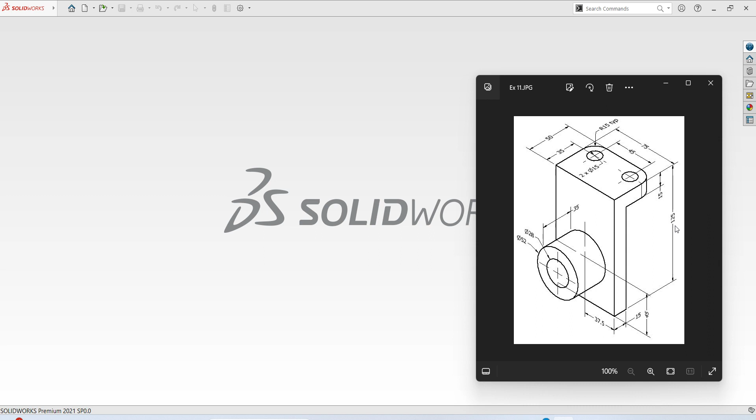You can see all the dimensions are mentioned. First I will create a base, then I will create a flange. You can see the base dimension is 125, 75, and 15 mm thickness.

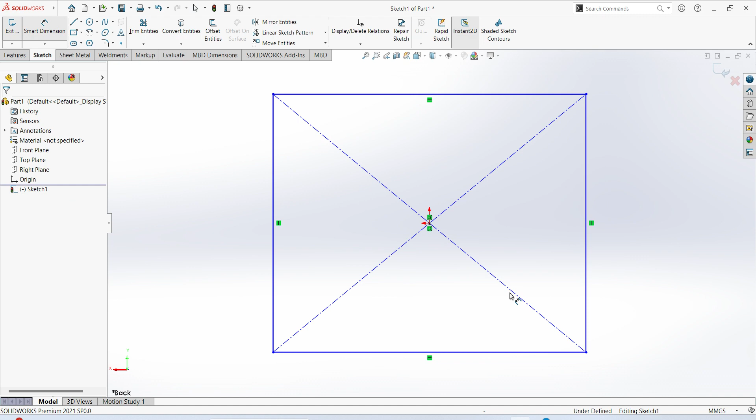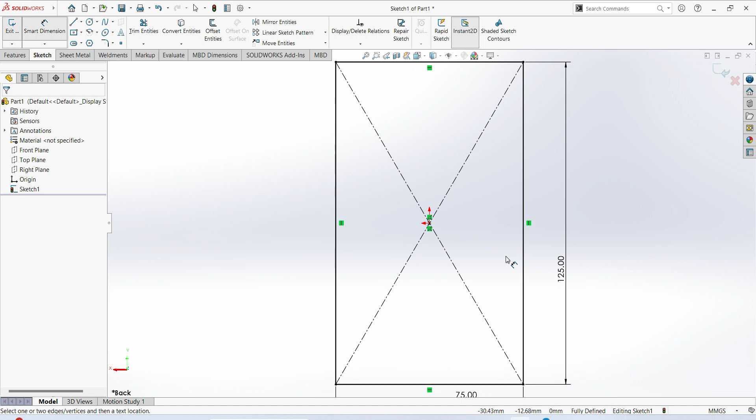Select extruded boss, front plane, normal, select center rectangle, give the dimension 75, sorry, 125. Finish sketch. Extrude up to 15 mm.

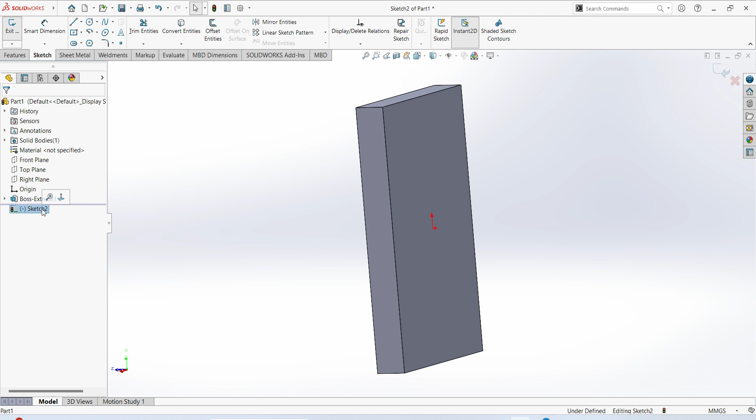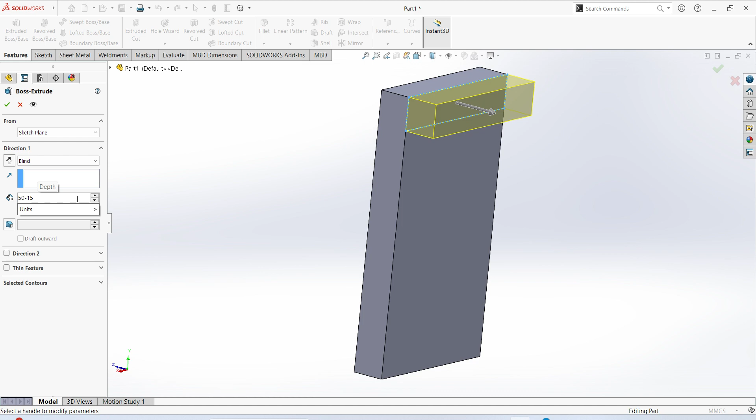Now you can see back side one flange is there, that is 50 mm length from the bottom. Select this surface, sketch, select corner rectangle, give the dimension 15 mm. Finish sketch, extrude up to 50 minus 15.

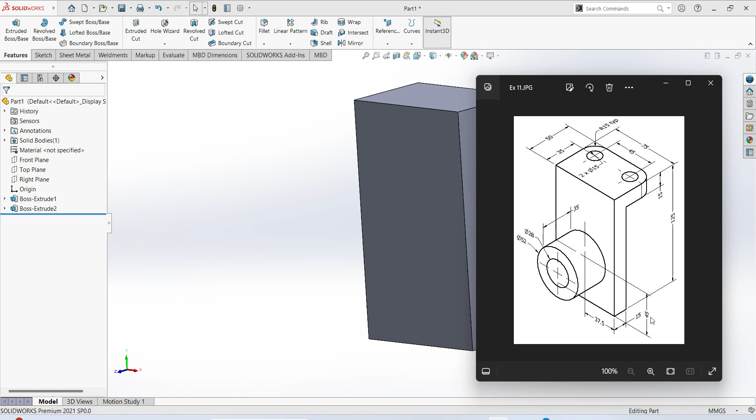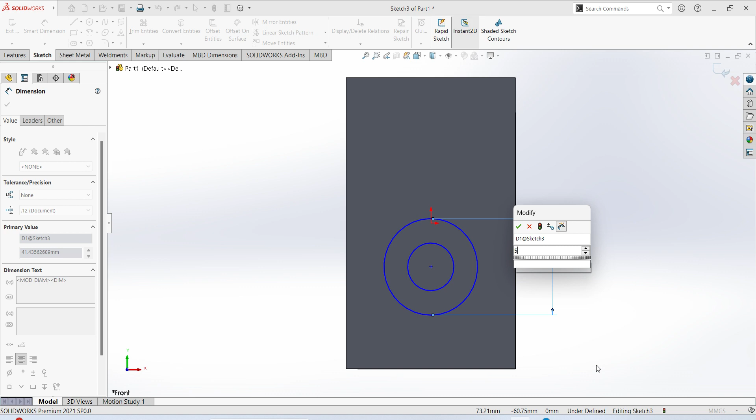Now you can see there is one pipe that is welded on the body. The dimensions are two diameters, 52 and 28, and dimension from the bottom 45 mm. Select this surface, sketch, create one circle, create one more, give the dimension 52, this is 28, 52 and 28.

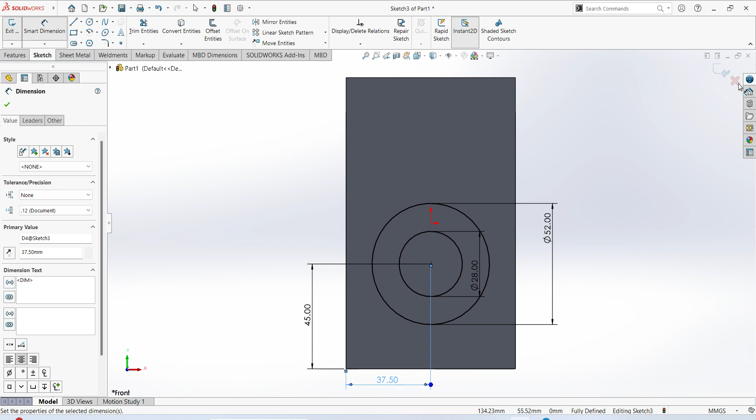Bottom to this, 45. Okay, sketch is fully defined. Finish. Select extruded up to 35 mm.

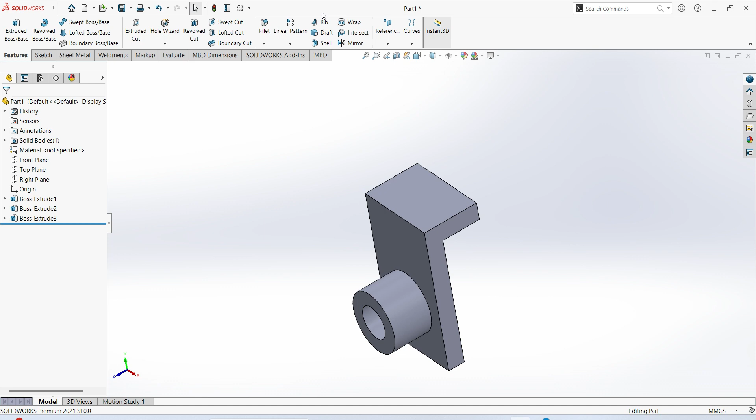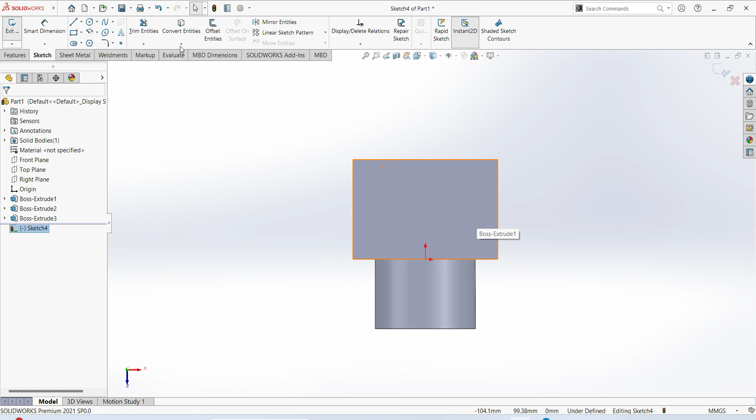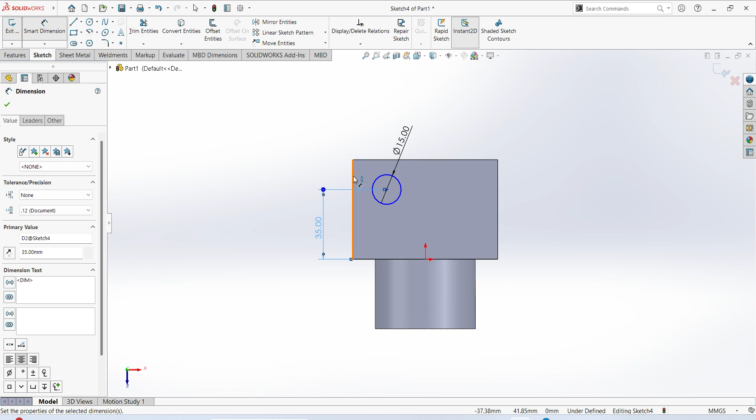Now you can see there are two holes on the top side. The diameter is 15 mm and pitch is 45 mm, and from the bottom 35 mm. Select the surface, sketch, select circle, give the dimension 15 mm, and from bottom to here 35. Extruded cut.

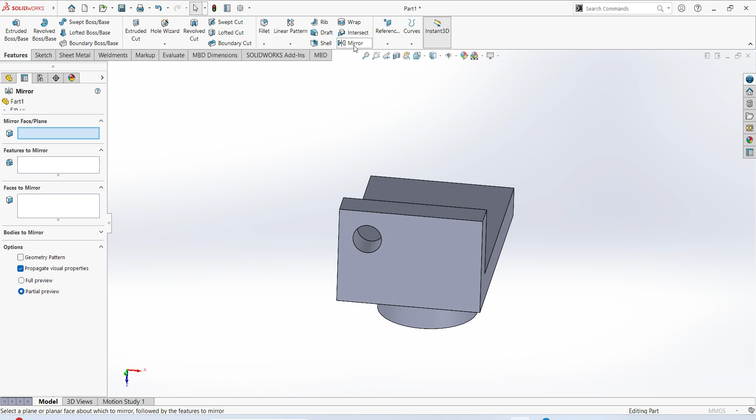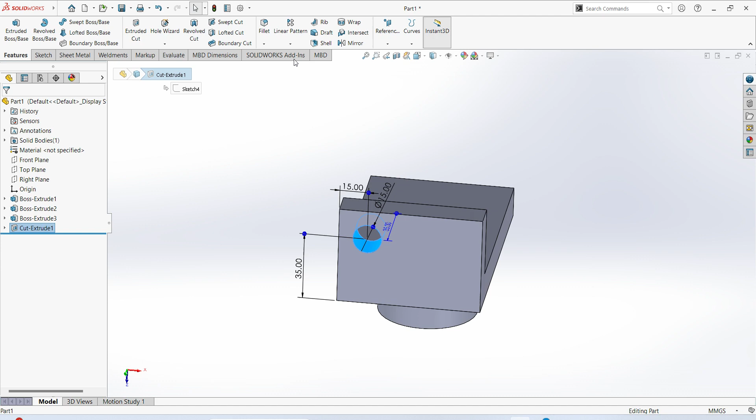So select mirror, select this cut, select this cutout, mirror, select this plane.

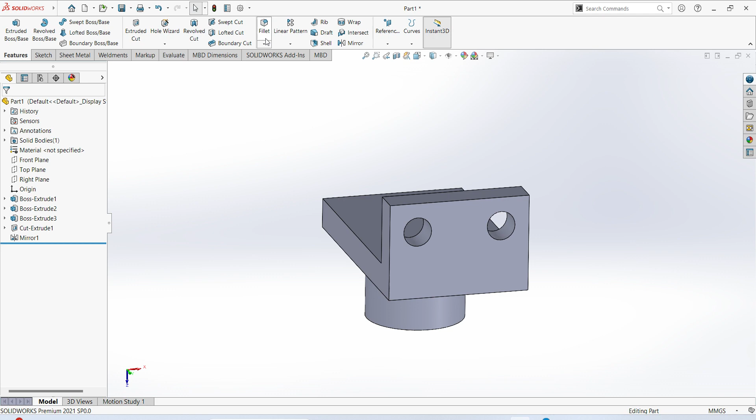Next you can see there is a fillet, that dimension is R15. Select fillet, 15, this corner and this corner.

You can see friends, all the features are added. If anything is missing, let me know in the comment.

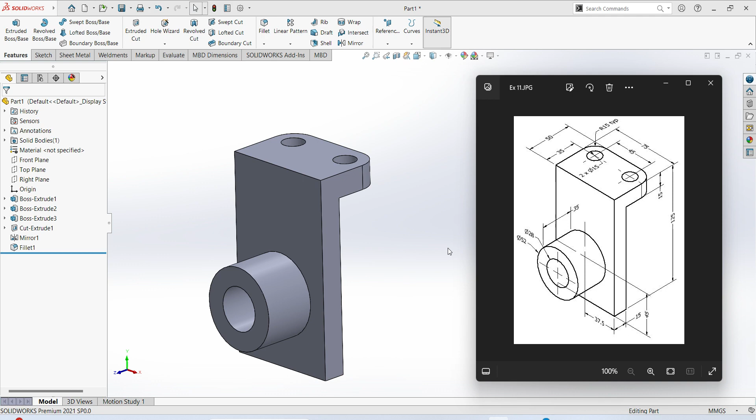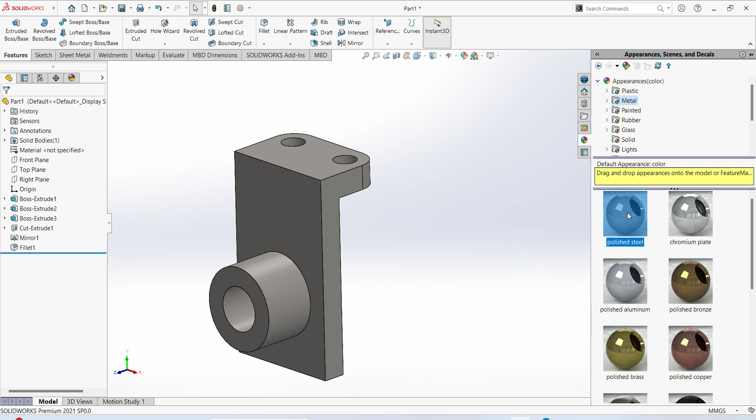Now I will assign the material. Metal. In the metal I will go with polished steel or polished. Save the part.